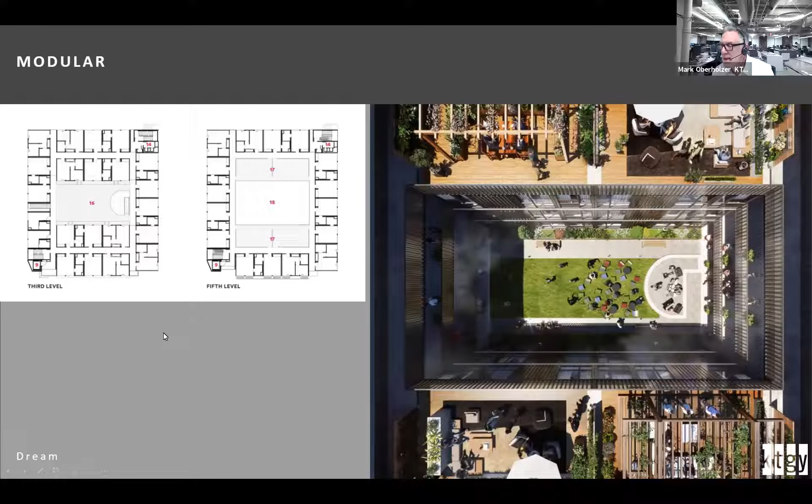A lot of that mess resulted in time, which made a lot of cost issues, and tied the whole thing together. The good news, though, is this is basically a donut building around a central court with some roof decks. This is looking down into the courtyard in a rendering, hovering above the roof decks. Like I said, everything above the podium is modular, and here it is being stacked.

Now, at this moment, the modules were going in with a crane off of Alvarado at the rate of 1 floor per week. And I think that's pretty typical. This is 87 units, permanent supportive housing, 1 floor a week, knocked it out.

But then there really were a lot of issues with the building. Like I said, it was kind of an experiment, and we learned a lot of lessons on this. Most of the lessons were about modular.

Just for instance, one well-learned lesson: if you look at this, this is one module. It's a unit or half a unit, corridor, half a unit. This is just half a unit. It takes the same amount of time to place this half unit as two half units. So basically we had designed this without thinking about how much more time we could have saved if it was primarily double-loaded corridor, right? That's a dumb example, but that's the kind of thing where you just go, oh, it's a head slapper. For future projects, yeah, we've learned that.

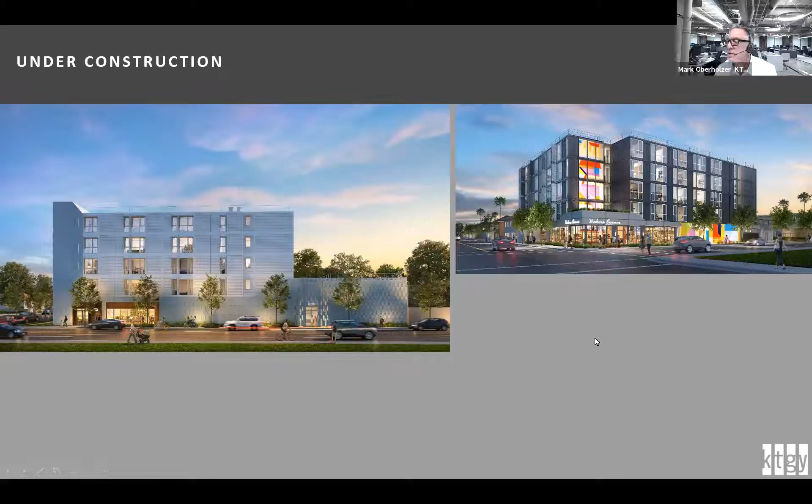This is Broadway, Hope on Broadway, Hope on Avalon on the left, which is in the county, and this is Hope on Crenshaw, which is within the Crenshaw specific plan. So this one, if you're like a modular nut and want to see them, these modules are going to be lifted on the 29th of this month, November. So if you happen to be passing by, you can see that if you have an interest in it.

They hired ETA. They had a whole different approach to accessibility, and I love this: there have been multiple non-compliant issues for which there is no current solution. No designer, developer, operator, owner, or nonprofit wants to hear that, right? That's very, very complicated, and everyone knows it's a problem. Everyone likes to complain and point fingers, but we all collectively know it's an issue. From HCD to DSA to the CASPs to the court-ordered neutral accessibility consultants, it's definitely a problem. I think everybody, if you've done any affordable housing, you're tripping up against this.

And so that's something to keep in mind. I wish I could say I've got a great solution for you. I really don't, but it should be on your mind. I know that, just like a lot of difficult problems that exist for a reason, there's more work to be done on that.

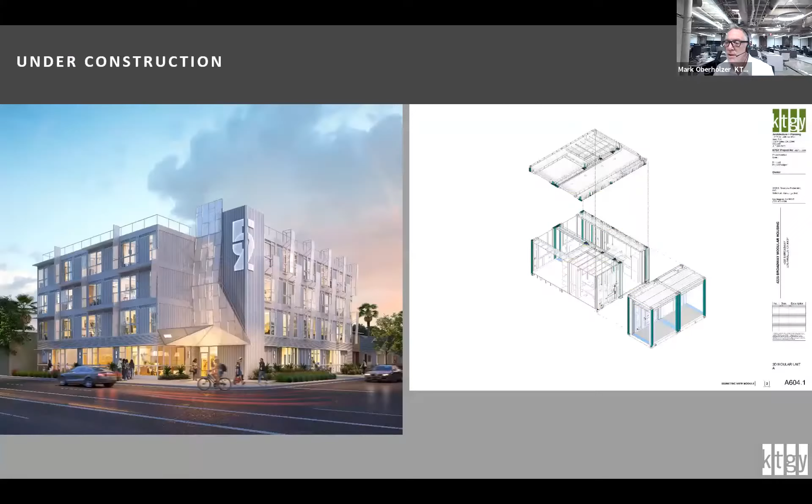So with that, I'm going to wrap it up, and I'd love to hear from Daniel. I think we decided to kind of wait and have a nice conversation with questions after Daniel presents. Well, we can do that, or you have some time. I think we're only about 23 minutes in. Oh, I thought I had, do you just want to take a few minutes? Comments, or 25, 30? Oh, okay. Yeah, sure, let's do it. Yeah, I think we've got time for comments.

Let's see, in the chat Lindsay was asking how did the modular units coming from China work with LADBS? Oh yeah, that's really a non-issue basically. The way that modular works in California, and some states are following and some aren't, but in California the state Department of Housing and Community Development, you basically submit to the city for site-built work and to the state, through the Department of Housing and Community Development, for the offsite work, right?

Modular or whatever is offsite, right? And HCD, which is the State Department, has a list of 8 or 10 private company consultants who do the plan review and also the inspection. So at this time, when this project was under fabrication, it really meant that...

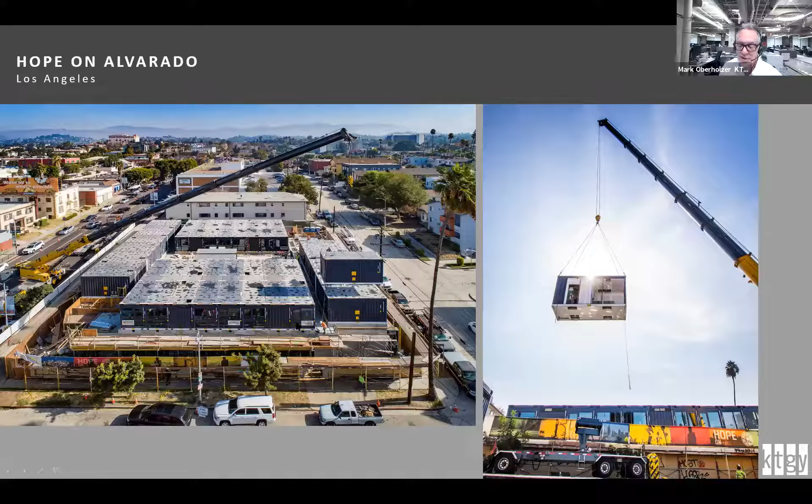Tagging onto that, and this isn't really the question, but I can't help but reflect that with anything built off-site, this is where the frightening part of accessibility comes in. This project has four stories and 87 units, but something like 216 individual modules—that's a module, that's a module, that's a module. If you have an accessibility problem in a factory, you have it in every unit, because they're all built the same exact way.

It's a factory, right? So you kind of need surety. What we are doing right now, basically with accessibility inspectors—the ones we've hired for the team, but also sometimes we've been able to get agency inspections on an informal basis at the factory, as long as it's not in China. So they're coming to the Southern California factory and looking at things and having those discussions. That's a little bit of how disconnected manufacturing can be a problem—if it's more local, it's easier.

Makes me wonder if you could do a virtual mock-up review with a consultant and their inspector to help facilitate that. Yeah, no, we hadn't thought about that. I wish you had been on the project team—maybe we could have.

So just to follow up, you're basically saying you relied on your ADA consultants more so than any city regulator? No, both, right? Because—this is where I start to get a headache trying to explain it, since I don't fully understand it myself. We've got a CASP, right? We have to have a CASP.

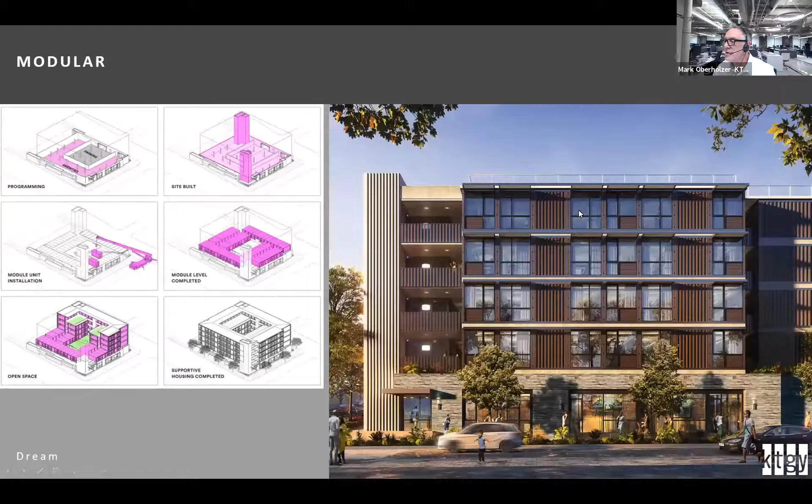The other issue is that wood needs to be protected during construction. If you remember the Casa Paloma project we've got under construction, it's not a giant issue in Southern California because we don't have a lot of rain, but it really can't sit here for very long because it's not watertight. It's shipped watertight for shipping purposes, but not watertight like a finished building is watertight, so it's more vulnerable during construction. I don't think that aspect matters a whole lot in Southern California, but in some climates it can be a big deal.

There's some famous wood modular projects that got caught with a really bad series of storms, and it suffered some destructive testing and rebuilding from the inside out, which is very unfortunate. Steel is better at that, but it's just different. You can go taller with steel, and the cost is kind of similar, but the process is different. So that's a sort of answer and non-answer.

You asked what were the issues of quality with the Chinese modules. There wasn't a quality issue. It was really the ability to inspect them that was the problem. And it's really the changing conditions. You have risks in every project, but the risks are different. The risk in China was we didn't realize there was going to be a tariff risk, but that was a big risk - not the designer's risk, but the project team's development risk. They had to absorb the tariffs.

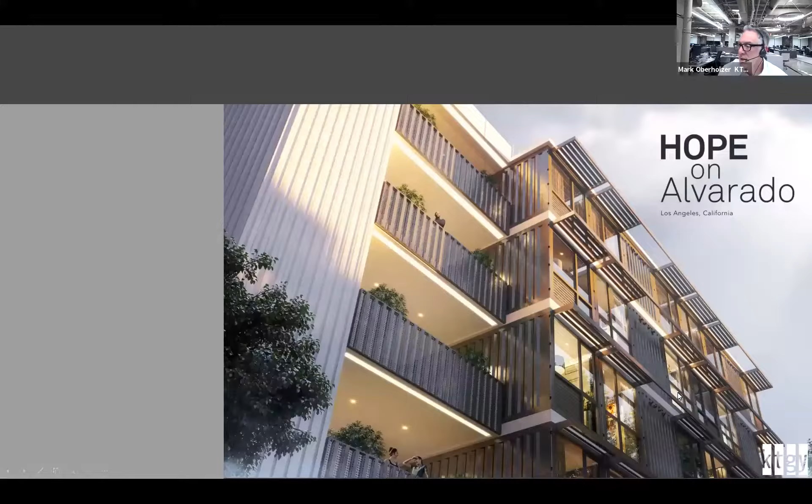On the steel side, it does depend a lot more on the construction of the modules and the manufacturer's approach to it. And that's where the more custom you are, the more the manufacturer will be utilizing a third-party testing company like Hilti or something like that to run the tests on them. If that answers your question.

Cost differences - I would say the cost differences per square foot, if you pick up the phone and talk to almost any modular company, they'll tell you the base per square foot price is $150 to $185. So that's per square foot of module - one square foot costs, I think this was 160 or 150, I can't remember, but that's the range. And pumping up the interior finishes, reducing the volume, increases the cost too.

That's why if you have like a 20 unit project, it's really not going to be modular - it's hard to make that work, except for almost like a solution like Crate Modular. They do a great job because they're basically retrofitting existing shipping containers, although maybe I think they're also segueing to purpose-built steel. Anyway, it's harder to find a manufacturer to do a small project, and it's because of that.

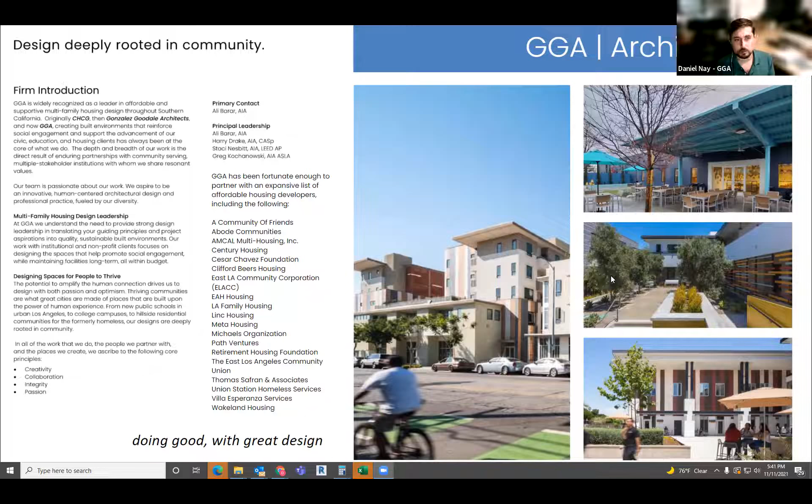I'm going to primarily be talking more about housing on the affordable side, and more projects from one developer I've worked closely with. I maybe have a little less experience than Mark, being a little younger, so a few less projects finished, but my experience is focused both on the regulatory side of affordable housing and some of my own experiences.

So this is our whole office. We're pretty diverse, and I show everyone because I'm showing a lot of the work that they're responsible for and lessons learned from them. It's a team effort here, and I want them to get the credit they deserve as well.

And these are kind of what we focus on: housing, civic, educational. I'm on the housing side, of course, but we do all these scopes of service.

Every presentation starts with this, but I'm going to talk about it. Of course, we are in a housing crisis, and a little bit of background is always warranted to say where we're at, why we're here. Some of this information is informative.

This is from reports that are a little bit older, but you can see the trends of development at the top left. This is basically units delivered from 1950 to 2016, and you can really see the peaks and valleys of a recession here. We've never really recovered since the 2008 crash, and that deficit is really one thing we've been working against to try and recover and build more housing.

Also interesting to note that it's really a split now between multifamily and single family, but still both levels are historically quite low. They're saying we are doing about 80,000 annually; we need to do more than double. Also, ownership is decreasing, renting is increasing, which is shifting the rental dynamics. We have lower historic zoning density, which impacts some of that.

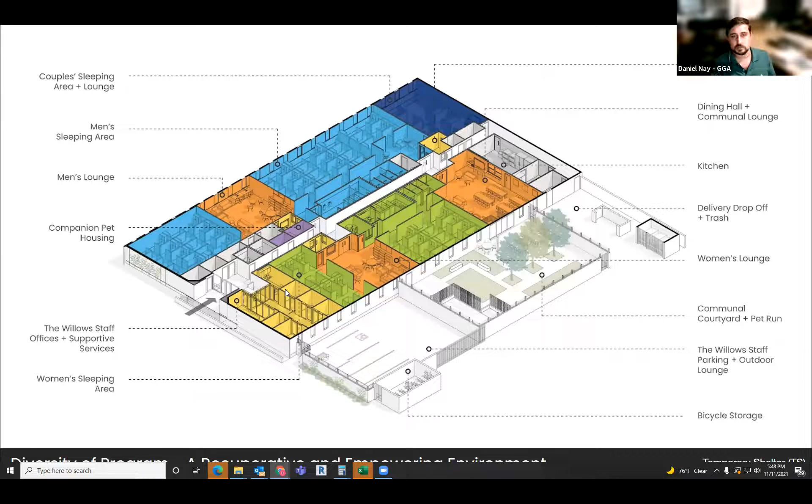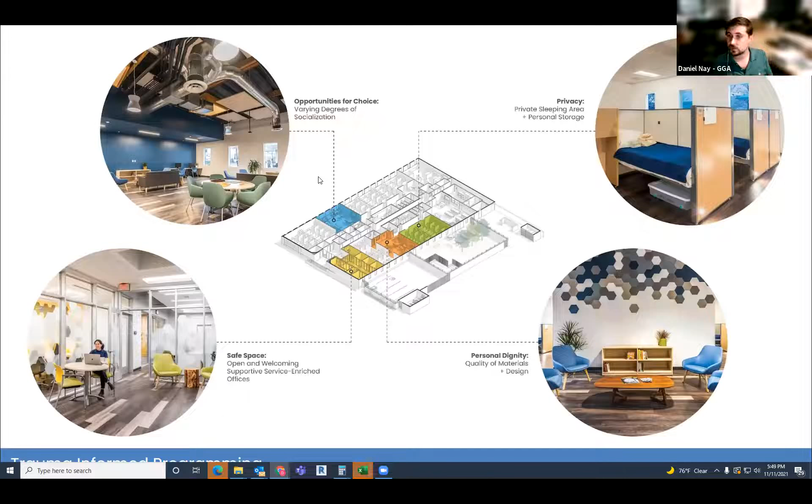These were some of the thoughts that went into making this a place people will actually want to go: privacy, opportunities for choice, safe space, personal dignity. Mariana and Caesar put a lot of thought into making this a space people would want to come off the street and into. There was a lot of regulatory burden and also a rush to complete this project, because the mayor's office needed these facilities open in reaction to a court order, to allow them to get people off the street or tell them there's somewhere to go. There was an injunction placed by a judge — long story short, if there was no facility in operation where people could be told to go, the police shouldn't be able to tell them to get off the street. These were some great diagrams Caesar did that really got into the space of how each area should work, a great way to think about how to make these spaces personal.

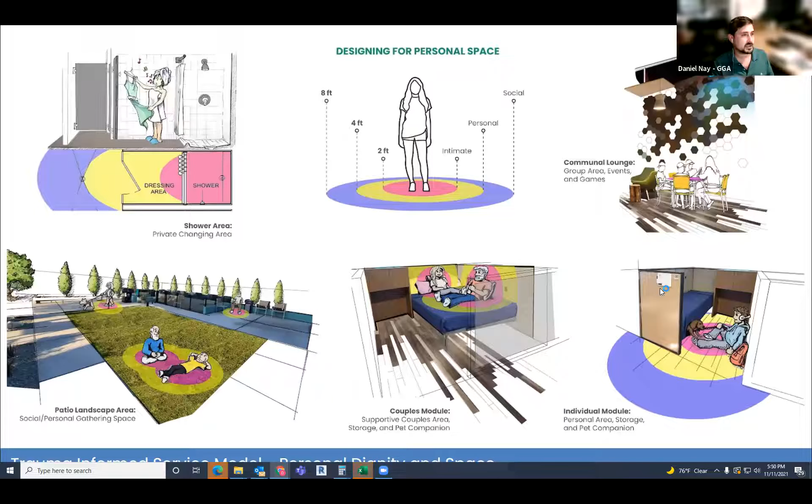Okay, let's quickly talk about the biggest example of a project we've completed. Ali Barar, the principal at our office, led this project and knows more about it, but I wanted to show it because it's really an example of all these services and permanent supportive housing coming together. This was probably the best model, and it informed the design of the project I'm going to speak about that I've worked on. It's LA Family Housing's campus, up in the northwest area of Los Angeles.

It's basically taking their offices, their service center, a clinic, everything they do day to day and putting it into one. It's the first kind of model I've seen like it, and I think it's really one we hope to see replicated despite the challenges to bring all of this together and the opposition and complexity you have to go through to build something like this.

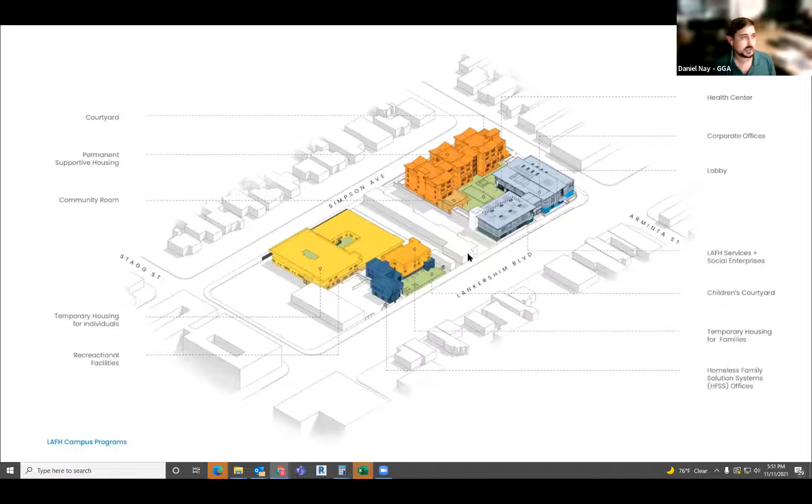So this is kind of just the campus layout. Again, the permanent supported housing component, temporary housing, intake, recreational facilities, the LA Family Housing Services Center, their corporate offices. It really was a massive project, about the size of a city block. It was a great success, and the model that we took for our permanent supportive housing that we later did. Just some photos of the different areas and how it turned out.

So this is Summit View. This was for LA Family Housing. This is the project I've been working on as project captain for the last 3 years. I've been involved from schematic design all the way through to about 90% completion. It's veterans' permanent supportive housing, 49 units, traditional type 5B over concrete. There's a lot of complications with the project and site, and I'm going to try and talk through a little bit of my experiences about it, using it as a case study.

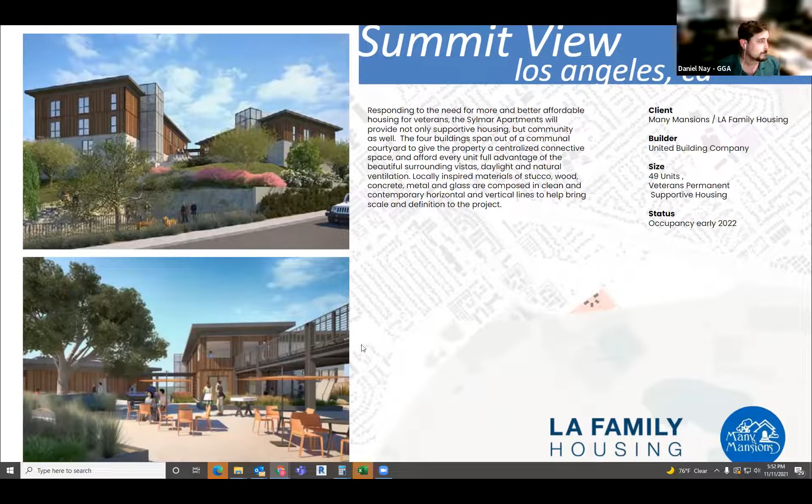So first, the design of the site, how it started. It was LA City land that was previously entitled and never built on. The reason it was never built on is because it's very aggressive topography—there's about a 50-foot grade change from the street to the top of it. So it had both entitlement conditions, Q conditions, a lot of complicated entitlement associated with it. It also had to go through environmental EIR and a whole series of that, which I wasn't involved with, but had to make its way through permitting.

So a little bit about the site. This is Sylmar, which is LA City, but kind of the northern part of it. It's right next to Hansen Dam. This is the 210 freeway here. We really tried to take some influence from the beauty of the site and roll that into the design of the project, incorporating nature really as a rehabilitation space.

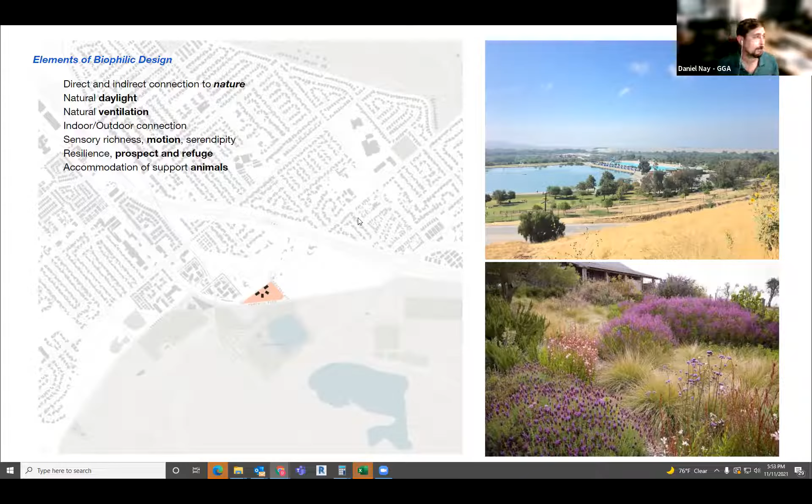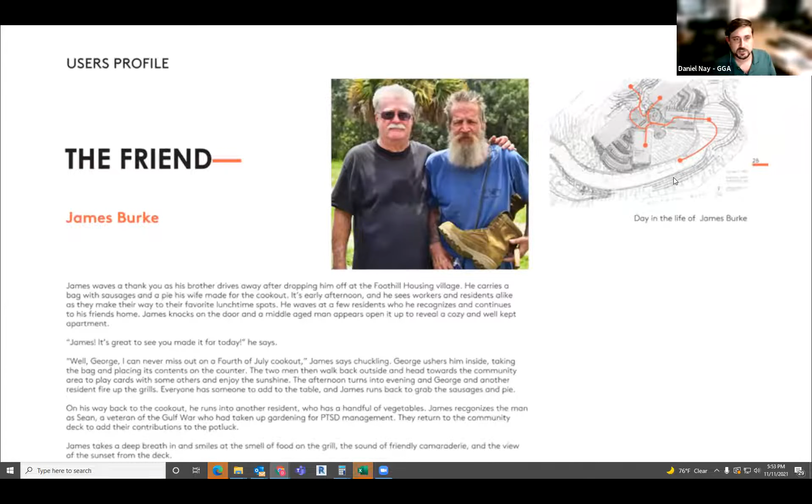Just a little bit of how we looked at it, who it serves. These would be the residents, homeless veterans, looking at how they use the site. Caseworkers—this is who day to day they interact with, and who basically helps them navigate whether it's their income stream or what they're dealing with, everything basically. So there's a programmatic design focused around the caseworkers' day and the occupants' day. And then there's friends and visitors and people coming to the site to see people.

So this is kind of the site, you can see here—each one of those lines is 5 feet, so we've got a 50-foot grade change to navigate. The land, by the way, was donated by the City of LA, so it was free to the developer. That's one of the reasons they took on the site and decided to try and use it, even though it had been undevelopable for people—it was a challenge to develop, let me say, at the least.

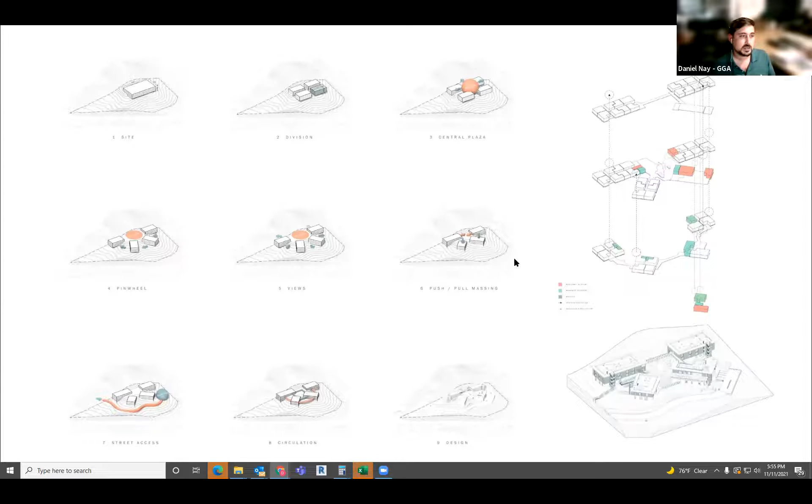Other constraints around it were obviously getting access, fire, and the street improvements that would be required to put a building up here. There's only one street, Foothill, down here about 50 feet below, and then there's only a partially improved portion of the street here on the rear. So a lot of site concerns on this project that fed into additional regulatory issues.

So this is it today, about 90% complete. You can kind of see those are the 4 massings set on the plaza. That was all rock that was ground down. That's the top of the hillside here. This is Kagel, which is going to be improved, and this is Foothill. The dam here is to the south.

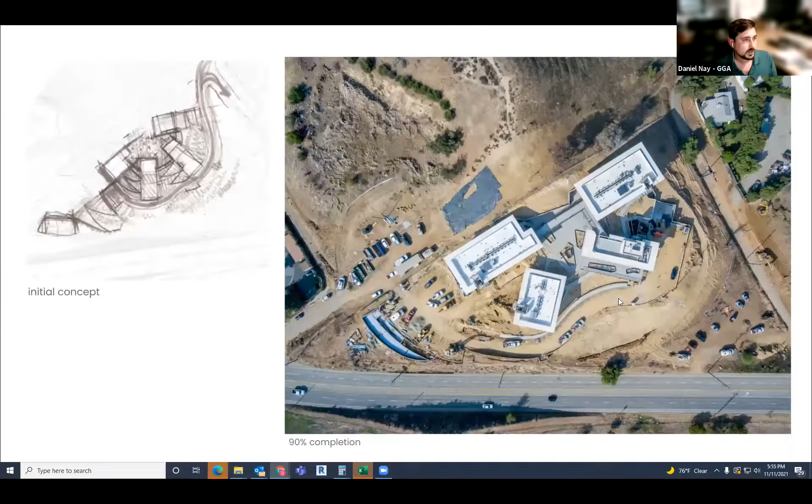So now I'm just going to talk a little bit about the regulatory issues that are encountered. That's what we're here to primarily talk about. The first thing I want to say is, as architects, we operate in the latter phases of the construction pipeline. There's a government regulatory space - zoning, planning, entitlement - everything that is set up and then passed to us.

In a public housing project, there are some different concerns than a traditional privately funded project, but at the end, if there are delays along the way, we're usually facing them. They stack up as the project goes on. Like Mark was saying, on these kinds of jobs, time can be a real concern and can even break the job if you're not meeting deadlines that are funding based. So especially with public projects, as time goes through each phase, you have to account for any kind of slip in time, an extra amount.

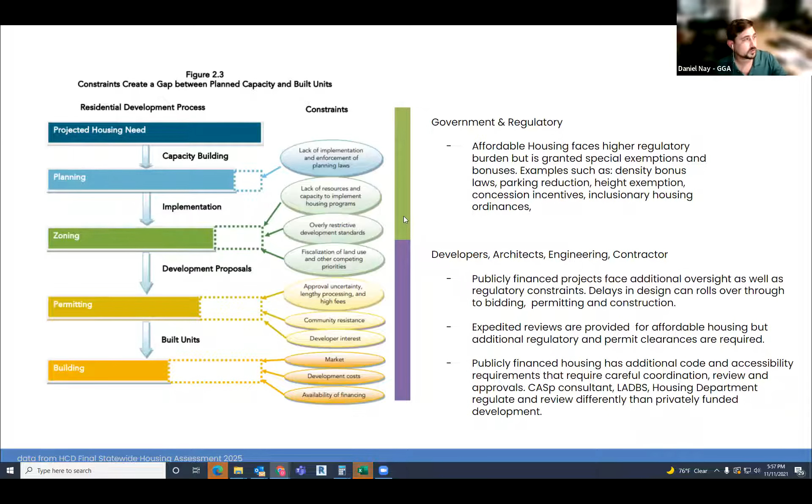So I just wanted to point out that that's really where we interface. The government interfaces up here, and there's a lot of work they're doing in the regulatory space. Ours is more in the latter phases.

Okay, so just a little bit about cost. I know Mark talked about this, but everyone wants to talk about costs and affordable housing. Just a few trends that influence cost and where we're at - we talked a little bit about it before. Typically the coastal areas, Los Angeles, any of the major metro areas are higher cost. The reasons for that are complex.

On this job, I'll break down where our funding sources are and what kind of issues they're imposed by them. But largely, as Mark said, there is more of a concern for material and investment upfront versus deferred maintenance. Most developers only have a certain amount of budget, and they want to make sure they don't have deferred costs once the project is completed. So there may be requirements for plywood casework throughout, or a certain square footage of unit, ceiling fans, garbage disposals - a whole slew of different requirements that can be imposed by funding or by ownership, because they won't have money to replace the roof in 10 years. It's very typical to have a 30-year warranty on your roof, which may not be typical on a non-public job. So there are different quality costs associated.

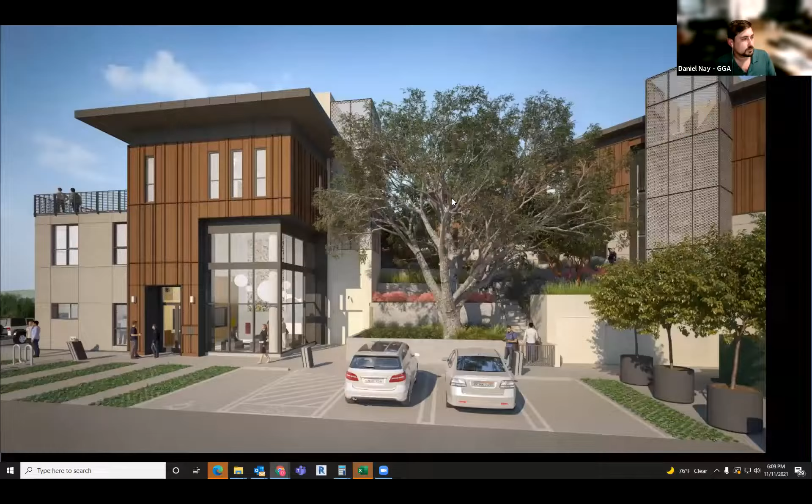This project's been a big challenge for me and a big learning experience, but it's going to be a fantastic place for some homeless veterans when it's done.

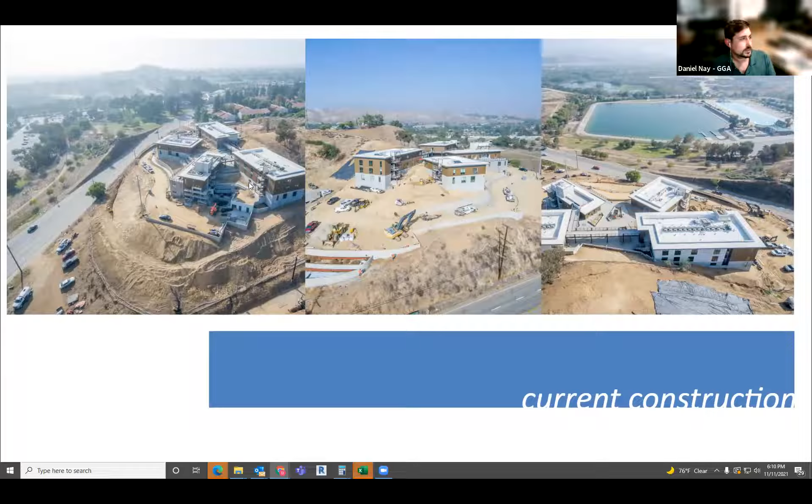I suppose we could probably open it up for questions for both Daniel and Mark, and even if they have questions for each other to kick it off. So many different topics there. I suppose the general question that comes to mind is: of the numerous headaches and regulations these projects are subject to, are there ones that you see could somehow be altered for the better, or should be?

Well, this is an AIA presentation here, and as you were talking, Daniel, I was reflecting on how there doesn't seem to be a correlation, at least in my fees, between the complexity of the shifting regulatory environment. Soft costs are high, but I don't think architectural soft costs are high enough. That would be my comment, half in jest and kind of not.

I don't know what you're seeing, Daniel. I don't do all the contract stuff, but I'm familiar with it. I think our soft costs are in line with the development costs of these projects typically, which are higher, right? Which kind of makes up for it, but it's definitely more time to do these projects, and unpredictable, I'd say.

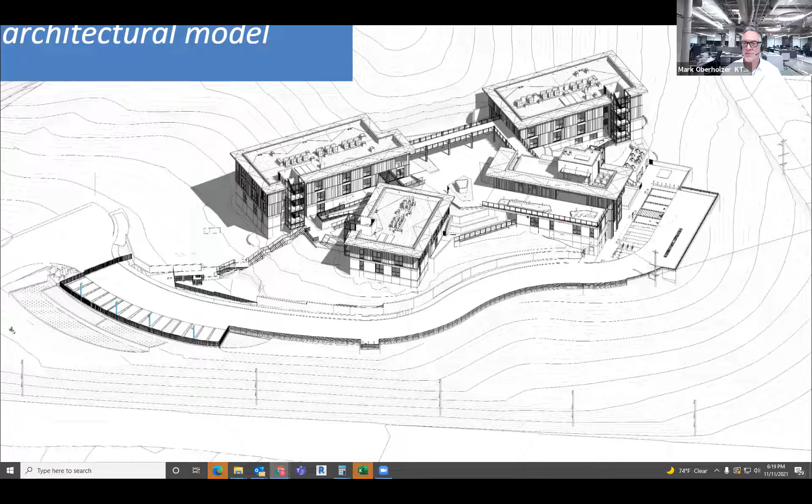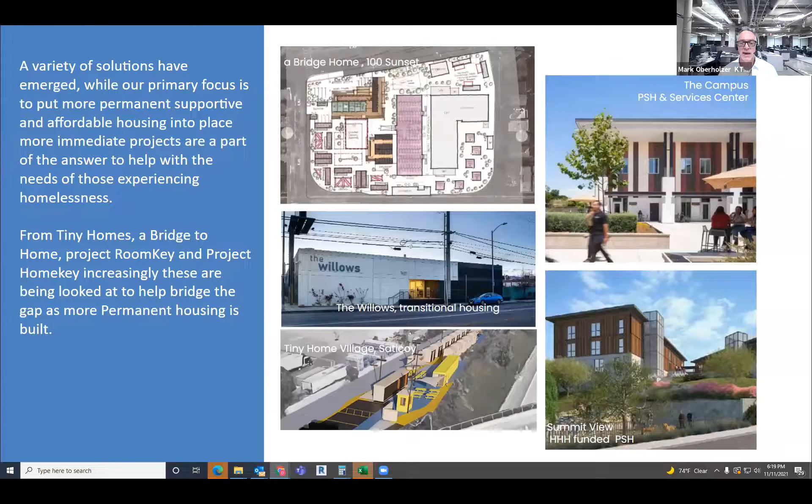The difficulty is that it's significant, and it's not a single problem. It's a larger environmental problem, and I don't mean in the sense of the natural environment—I mean the regulatory, the litigation, the layers of requirements, and to some extent the complexity of the program.

I think at the state level, a lot of the legislation passed in the last two years has basically resulted from constituent frustration with how long things take to entitle. That's short-circuiting significant delays, and I think we'll see the impact yielding more housing faster. But each project still takes 3 or 4 years, so it's a matter of time before you start to see the effects.

But I do think the local changes in LA, the TOC and some of the CPIOs, have simplified at least the front-end regulatory environment. And I think the state bills are making feasibility much more certain—giving more surety, not insurance, but surety—to projects being able to be completed. What I'm talking around is not having to do an EIR, which adds 2 years to a project. That's maybe one of the most significant pieces of legislation from the last couple of years.